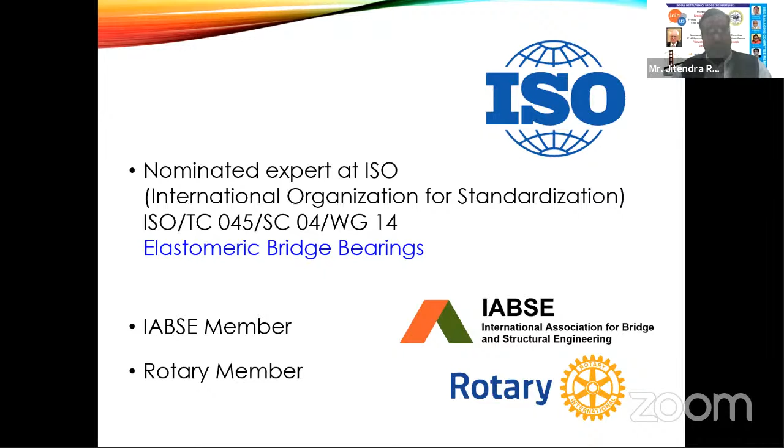Besides this, he is also a nominated expert at ISO, the International Organization for Standardization, where he deals with elastomeric bridge bearings. He is also an IABSE as well as a Rotary member.

Mr. Georg, as we all know, is of Austrian origin, but has been residing in Thailand, precisely in Bangkok, since the year 2011. There he is fulfilling the responsibilities of Vice President of the European Association for Business and Commerce Thailand, EABC, and Chair of the Working Group for Rail and Road Infrastructure.

So to summarize, we have with us today an expert conducting the presentation who carries experience of over 47 years under his belt. This experience covers the academic side, the specification forming and code development side, as well as professional experience. I'm very sure we're going to have a good learning experience through this interaction with Mr. Georg Wolf. Thank you very much, Mr. Georg, for joining us and accepting the invitation to be the speaker for this session. Now the forum is all yours.

I have a little bit of a technical problem. So, you see it's opened. Structural bearings - first, let me talk about past and present. The function of the bridge bearings, as everyone will know, is to transmit the loads from the superstructure to the substructure, as well as allowing for thermal movements and rotations due to traffic loads.

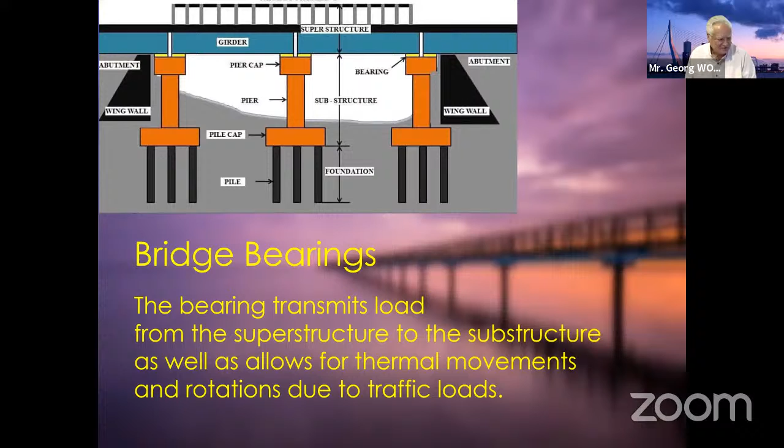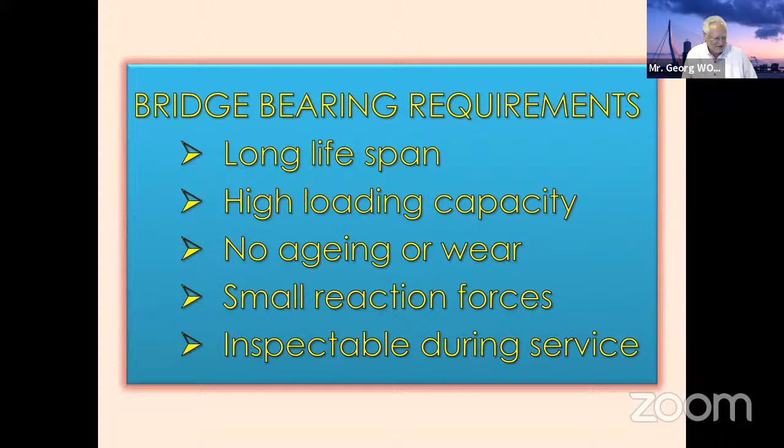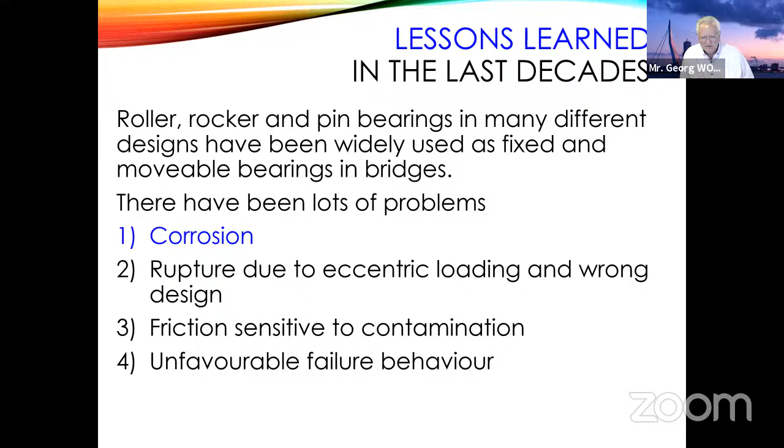And we learned a lot of lessons about this in the last decades. These bearings have been widely used, but they have a lot of problems. Mainly the problem of corrosion. Then we have some problems of rupture due to eccentric loading and wrong design. We have friction sensitivity to contamination, and we have unfavorable failure behavior.

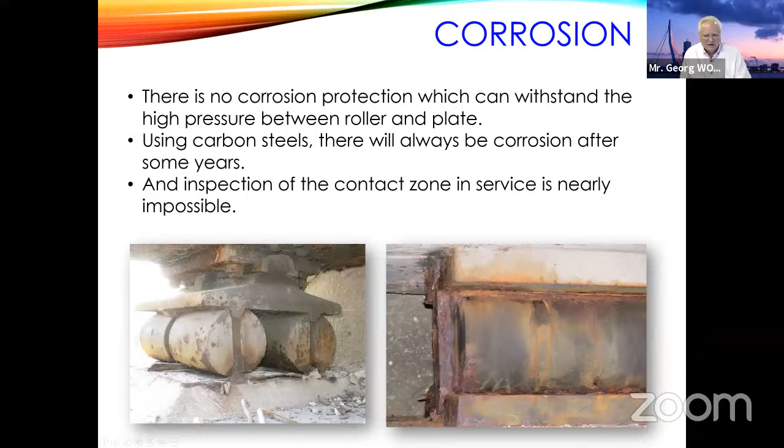So you see, these are examples of corrosion. Especially in many cases, we found a lot of corrosion at the contact lines, which is difficult to see from outside. It looked not so bad from far away, but in the details you will see that the bearings are not able to move anymore. The inspection of this zone of contact is very difficult. I think everyone who is checking bridges has already seen a lot of such examples in his job.

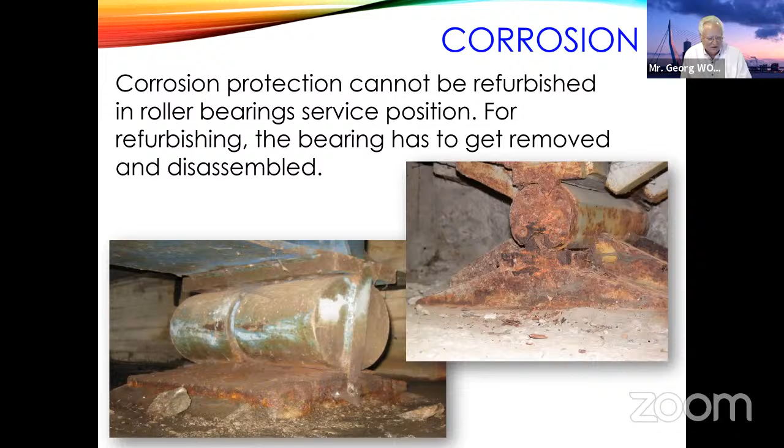At some time, in some countries, they tried to make stainless steel roller bearings, but as the loads are very high, you need a hardened chromium steel, and this is a big problem because with eccentric loading, when you have a little bit of transversal loading, it can very easily happen that the roller breaks.

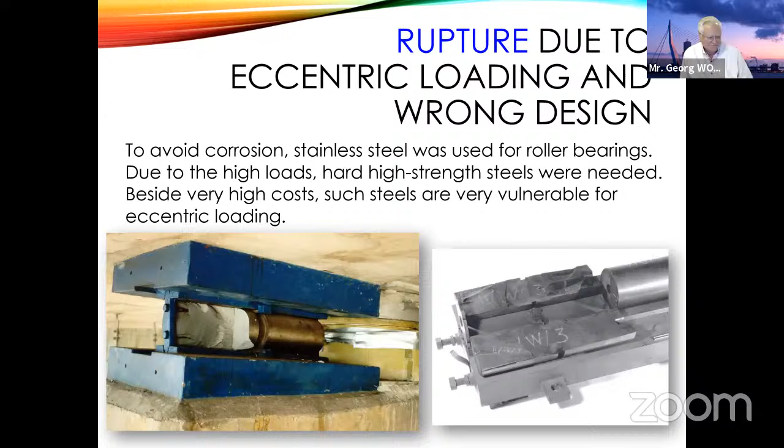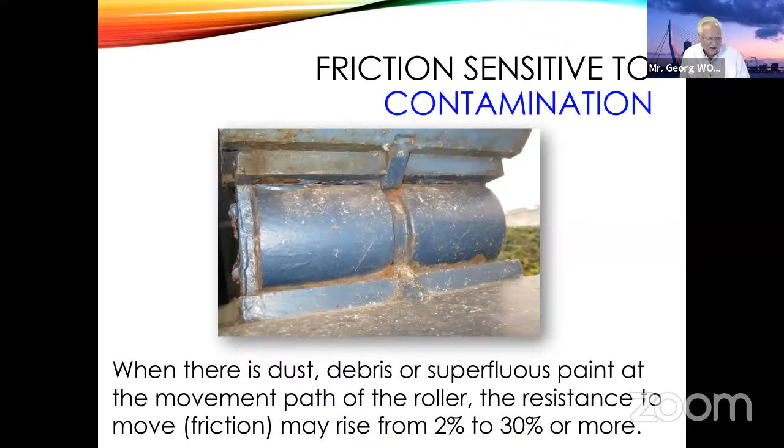Another problem we found is contamination. A lot of the roller bearings couldn't move anymore because a lot of debris and dust came to the roller level, and also we sometimes had people who were painting the bearings much too much. If you see here, you see the paint, and it happens that the friction went up a lot, and then the bearings were a reason that the bridge had to behave like an arch bridge and not like a flat bridge. Then another problem with those bearings was that in some cases the movement was too much, the roller was rolling out, and of course it has very bad behavior - the bridge is going down.

So this was the past, and then the modern times started with the laminated elastomeric bearing. This was invented already in 1920 by Mr. Freysinnet, but widely used only starting in the 1960s. The bearings are rubber reinforced with steel plate, where interestingly, the bonding in between has no technical function.

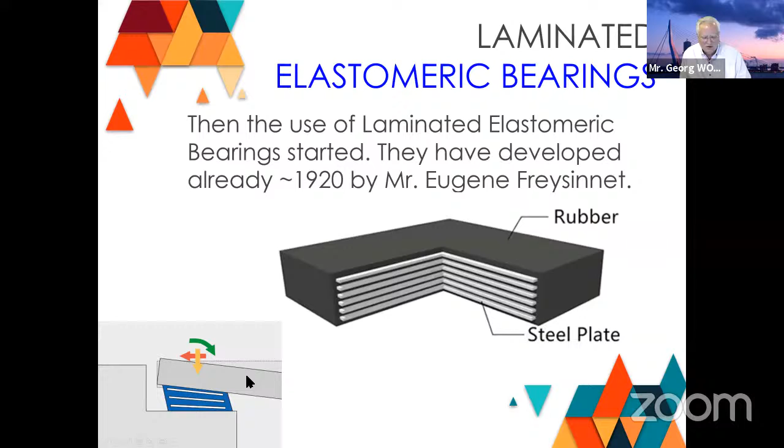If you just would take rubber sheets and steel plates, it also would work. The problem would only be that water can go in a little bit and you have corrosion. So the bearings enable movement and rotation, and of course load transfer. Here we see when we apply the load, we have a vertical deflection. When we apply the movement, we have a limit in this angle - it should be not more than a tangent of 0.7. And when we have a rotation, we have to put together the influences to check if the bearing can cope.

The bearing is excellent for vertical load transfer and free movement and rotation. The lifespan when the bearing is made of chloroprene or neoprene is very good. The same is today with natural rubbers, which include some anti-aging ingredients. The bearing is very well inspectable and it's easy to exchange.

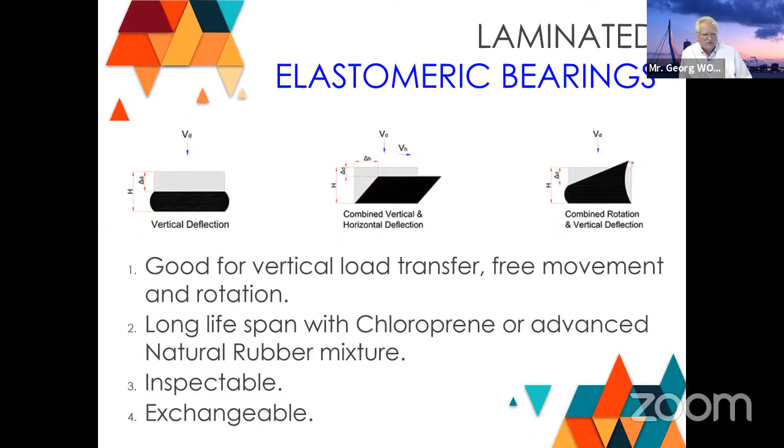Unfortunately, there are also some disadvantages. What we see as a limitation is we cannot transfer very high loads - 15 MPa, that was fine for the low quality of concrete we had some 50, 60 years ago. And we cannot transfer horizontal loads. Of course, you can make a combination with some steel restraints, but then you get again the corrosion problem. And when the movement is increased, the thickness is increased, and this is then also increasing the vertical deflection.

And you know, when I started my job, we designed the bridges only from a statical point of view. But today we always learn more that we have to look at the dynamic influence and especially the fatigue. The biggest problems with this fatigue we are getting at the railway bridges.

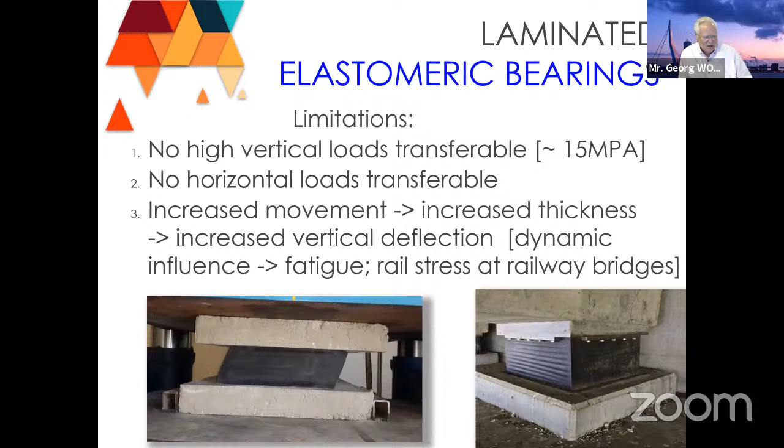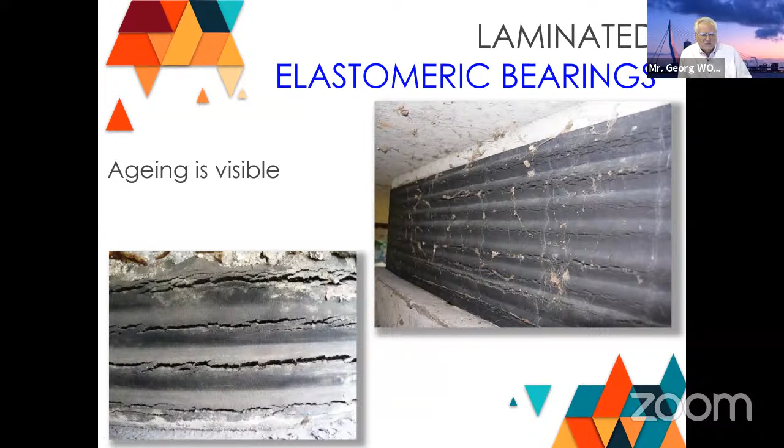Another problem is the slip out danger, especially in the warm climate. It can be a problem. Some manufacturers have waxes in the mixture, and at some temperature the waxes come out and have an effect like greasing of the surface.

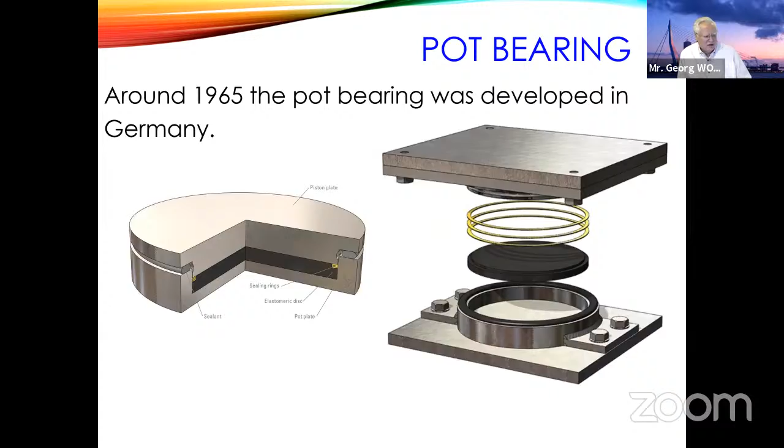This was, let's say, in the 60s, and then in the end of the 60s, in 1965, in Germany, the pot bearing was developed. The pot bearing is a steel pot with a rubber disc inside and with a seal. So the rubber is working like a fluid in a hydraulic cylinder, and you have a piston. On top, then shortly later, we got the PTFE sliding material, and in combination you can make sliding bearings and guided bearings.

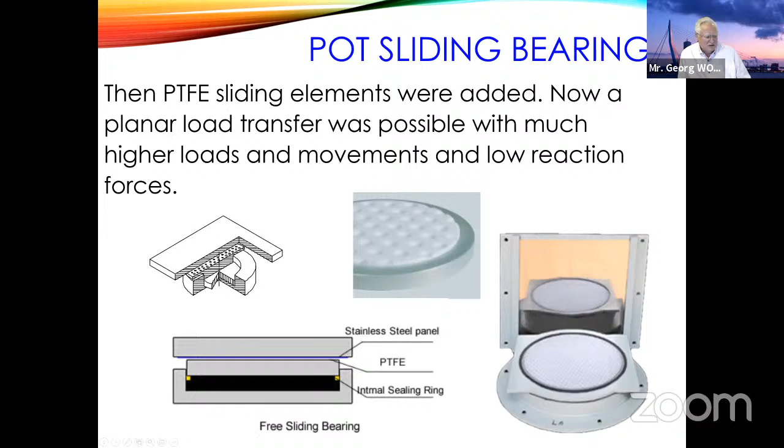This was then for a long time the best bearing to have high loads and movements with very low reaction forces, also at low temperatures, and hundreds of thousands of those bearings have been installed worldwide.

We can have a much better load transfer, an average around 30 Newton per millimeter square. We have very low reaction forces, also to the rotation. It's a very soft rubber inside, and it was used worldwide all the time.

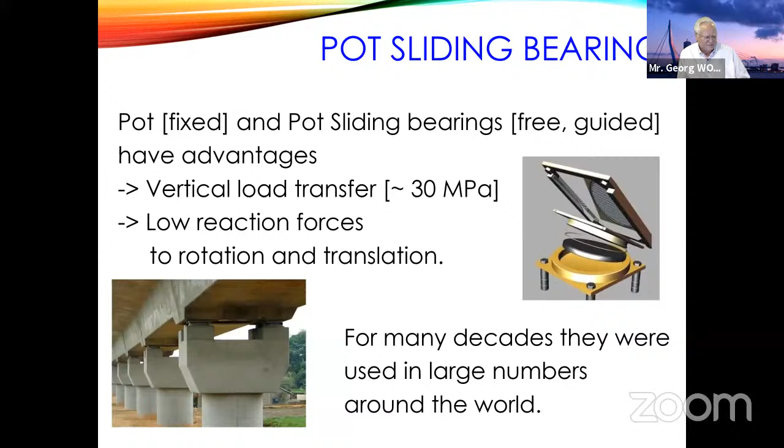But after some decades, not years, really decades, we found an increasing amount of long-term damages of the pot bearings caused by corrosion. The problem is the internal corrosion is invisible from outside, and it destroys the seals on the inside when the bearing is moving. Sometimes the corrosion is so heavy that it blocks the rotation of the bearing.

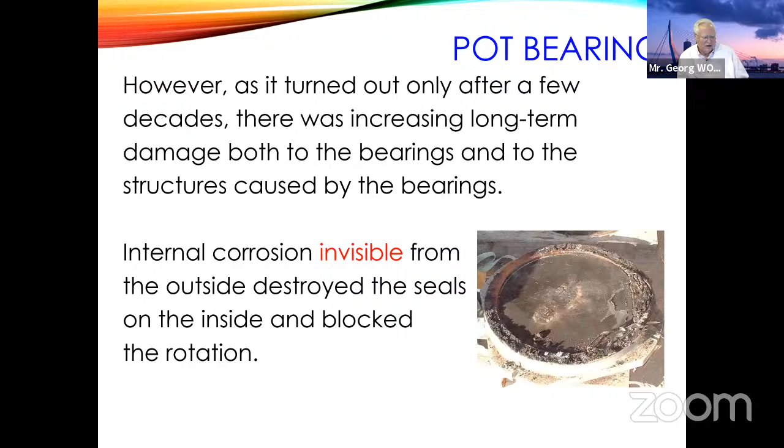These are some typical pictures here. You see this surface here, it should be sliding. It should be like the inside of a hydraulic cylinder, a very smooth surface free of corrosion. But when you have corrosion and it's moving, then this surface gets rough, and it really destroys the elastomer pad inside.

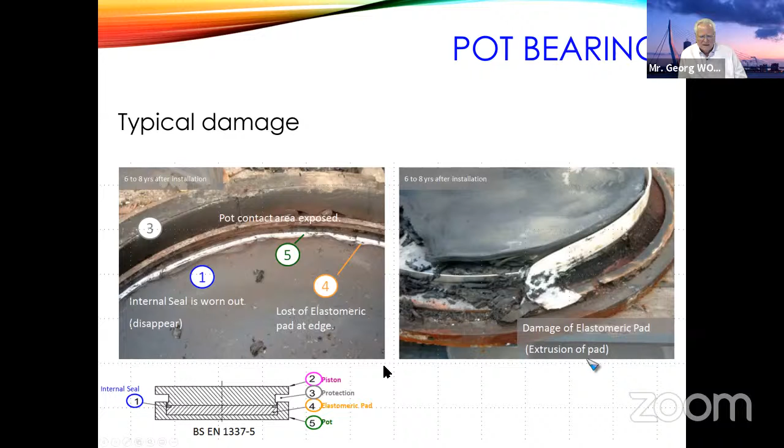These are the critical points here: this contact surface and the seal below. Of course, when you have a high quality seal, it will take much longer until you get the proper damage.

And of course, you could also do something against it by using stainless steel. So for around 8 years in Singapore, for example, only pot bearings made from stainless steel are allowed, but that's really incredibly costly. And still there is the problem that you have no check of the seal. You just have to trust that when you have stainless steel, you have no corrosion.

On top, we have the PTFE sliding, and in the long term we have seen a lot of wear here. Especially endangered are steel bridges, because they have more movement than concrete bridges, and this causes the wear. And of course, also railway bridges. I will come to that later.

The PTFE you can check from outside, but the pot itself inside you cannot check. This is how the damages look when the rubber is extruding because the seal is failing, or when the PTFE is extruding. The Deutsche Bahn was the first one who found out a lot of these damages.

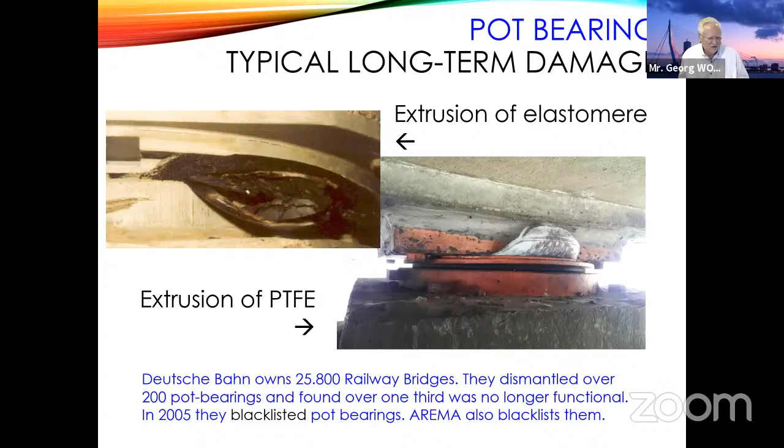Let's look to the PTFE, also called Teflon. It was developed in the 1950s, polytetrafluoroethylene, and it was the only long-term material transferring high loads with low friction. First used for bridges in the 60s, it became widely used worldwide. The negative long-term effects of creep and wear were neglected, and there was no real alternative.

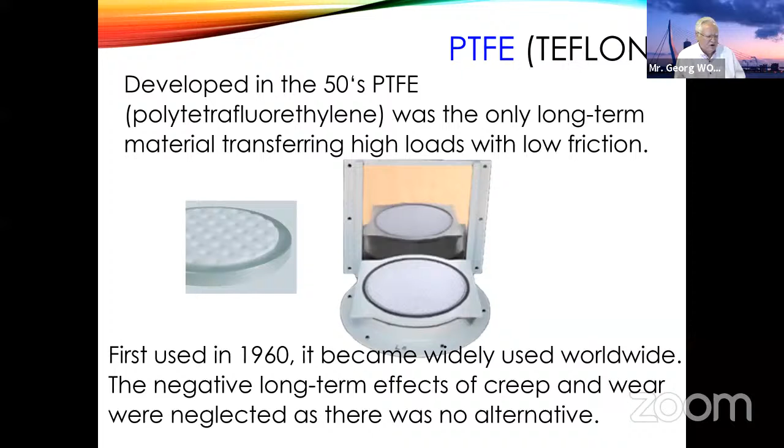When we look to the tests, you see here we have a PTFE test with 45 megapascal for 20,000 meters accumulated slide path. We have to say the PTFE is not looking good, but it's still alive. And 20,000 meters is a very high number.

On the right side here, we see a test of a non-dimpled PTFE. Normally the PTFE has dimples with the fat, with the initial greasing and lubrication, but in the guides you use it without the dimples, and this is already after 2,000 meters, it's heavily worn out. The problem is the thickness over the recess is only something like 4 millimeters maximum. And if the 4 millimeters wear away, then it touches steel to steel, and then suddenly the resistance to the movement jumps up. The problem is it's not very well visible. You really have to inspect quite often to find it.

And if the PTFE is overloaded, which can happen very easily due to rotation with eccentrical forces, then you have a long-term creep which is more or less not stopping. It's like a dough for a noodle - you squeeze it and it goes out.

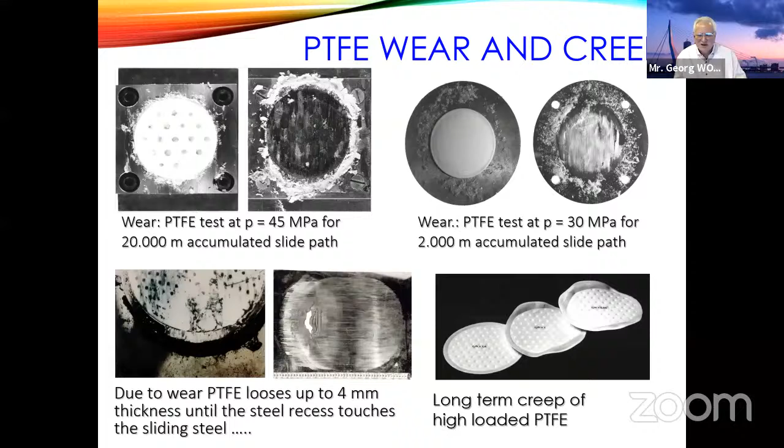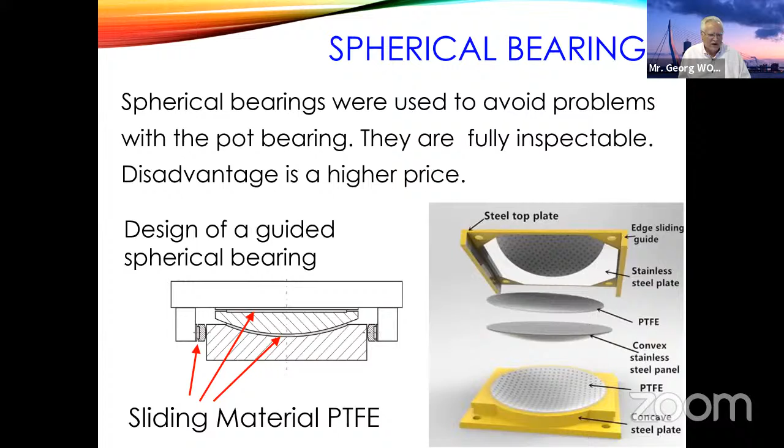To avoid the problem with the pot sealing, in a lot of countries they changed to spherical bearings with the PTFE, because at least you can check the PTFE from outside. It was working quite okay, but this type of bearing was more costly than the pot bearing, about 25% I would say. But very large such spherical bearings have been installed, you see a picture here.

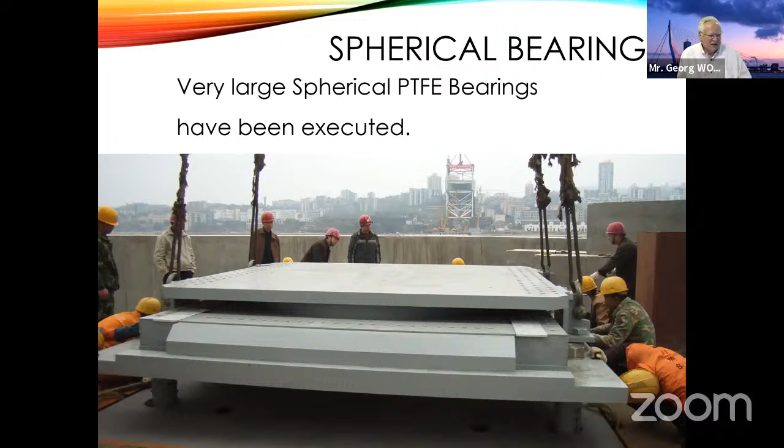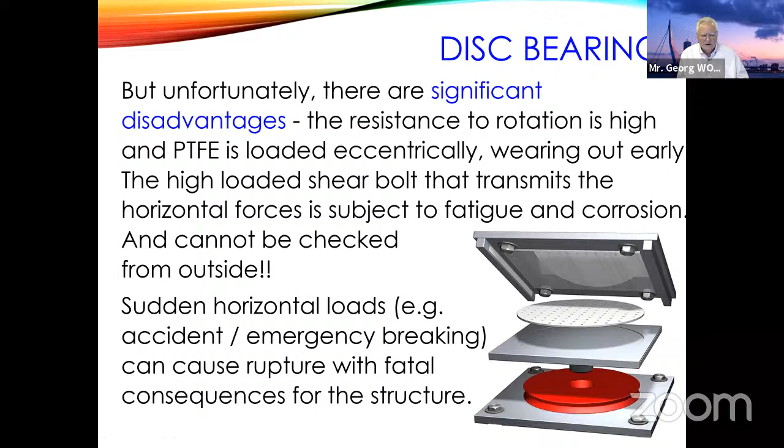And this bolt in the middle, which transfers all the horizontal forces, is subject to fatigue and corrosion, and it cannot be checked from outside. So when you have sudden horizontal loads, e.g. for a railway bridge you have emergency braking, or in a road bridge you have an accident on the bridge, then it can happen that the bolt breaks suddenly and you have no more safety for the horizontal forces. This is always covered, it's invisible. And this was the reason in Europe this bearing was never used.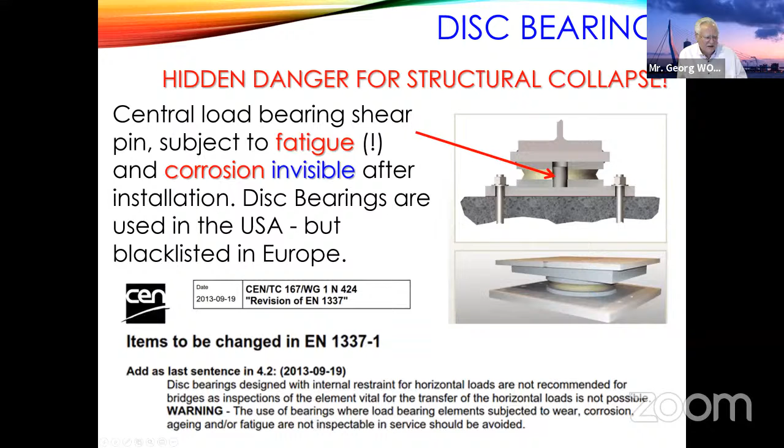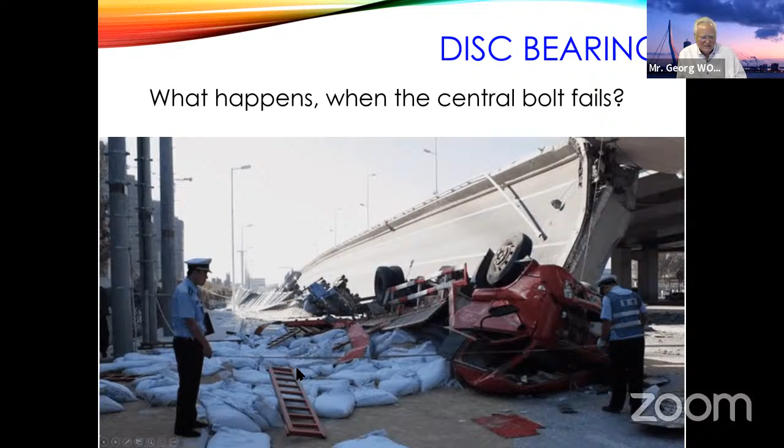So when the central bolt fails, it can look like that. I mean, this is just an eye catcher. I don't know really the reason for this falling down of a deck in China. Oops, sorry, I was a bit too quick now.

In 1969, Germany developed the magnetic levitation train, Transrapid, which is today in service in Shanghai between the airport and the city. There was a test track, and in this test track, PTFE bearings were installed. Within a short period of some months, the bearings were destroyed because the train causes a very small movement with a very high frequency, like a sewing machine, and the PTFE couldn't cope with that. It has incredible wear.

In the time of this development, around 1995, some bearing manufacturers in Europe joined together in search of better materials, and they found ultra-high molecular weight polyethylene, UHMWPE, and developed the material, testing different formulations, finally getting a European technical approval for it in 2002.

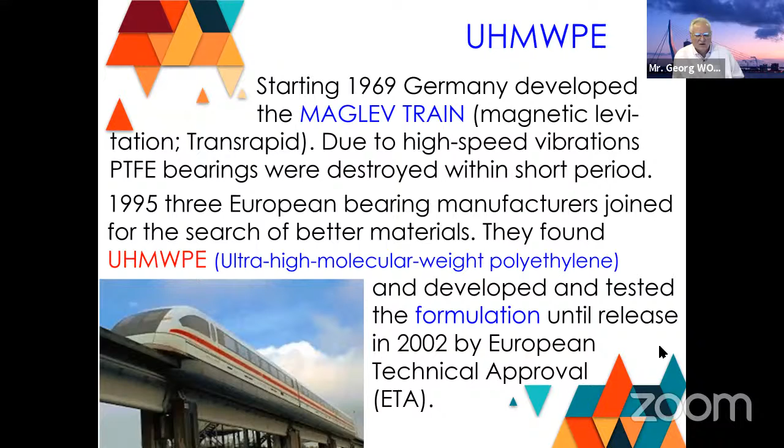This material has a lot of advantages. It was a kind of technological breakthrough in terms of service life, because with this material you can transfer much higher loads with low friction, and you have no wear and no creep. The material is absolutely resilient and undestroyable. It has no aging effects.

So we found, since we know the material, no change of the material if you are within the load limits of these approvals or even further. The material itself has been used over 40 years as a successful biomaterial for artificial hips, knees, and spine implants in clinical use.

But this has a white color, and the special thing for the bearing is it's a mixture in the material with some ingredients which are, how to say, not disclosed to the public.

With this material there was a 50,000 meter test, running for an incredibly long time at a temperature pattern where the temperature changed from -35 to +40 degrees. When you look at this material after this incredible test, you see it has no wear, just some marks or scars from the movement, but it's still like new. You could make another 50,000 meter test, but that would be too costly. The test was running at the University of Stuttgart, and it was very expensive.

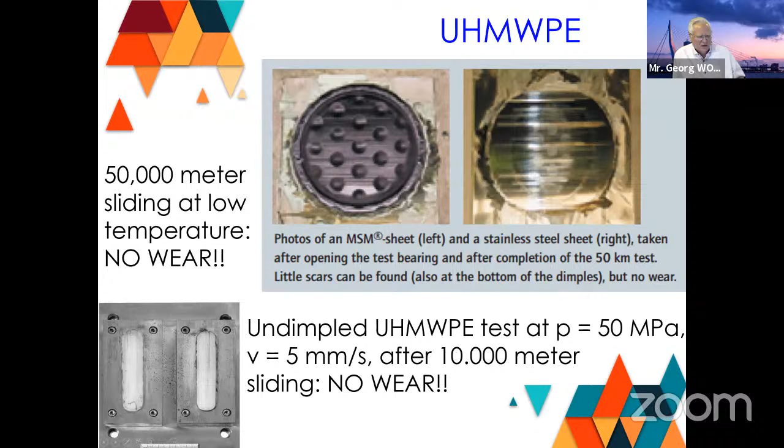Below you see the undimpled material which is used for the guides, also tested with a high load of 50 megapascal. After 10,000 meters, nothing, no wear is visible. If we compare this again to PTFE, it's very obvious what a big difference there is.

So this material can be used in the spherical bearings. You can have the rotation with this material, you can have the sliding movement, and also the guides with the material.

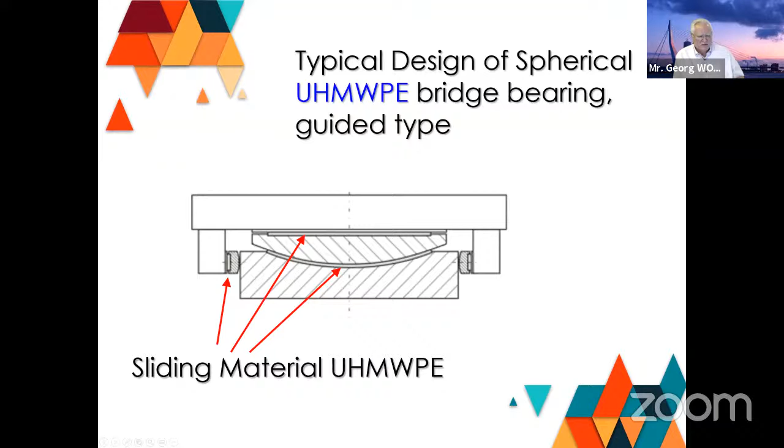When you compare now 3 designs of bearings, you see the high load capacity. For a vertical load of 10 meganewton, the rubber bearing will have a diameter of around 920 millimeters. The pot bearing will be around 650, and the ultra high molecular weight polyethylene disc will have only 400 millimeters. This also goes very well with the use of ultra high strength concrete, which is getting more common. And of course, when the bearing is much smaller, it's also cheaper, it has a lower price.

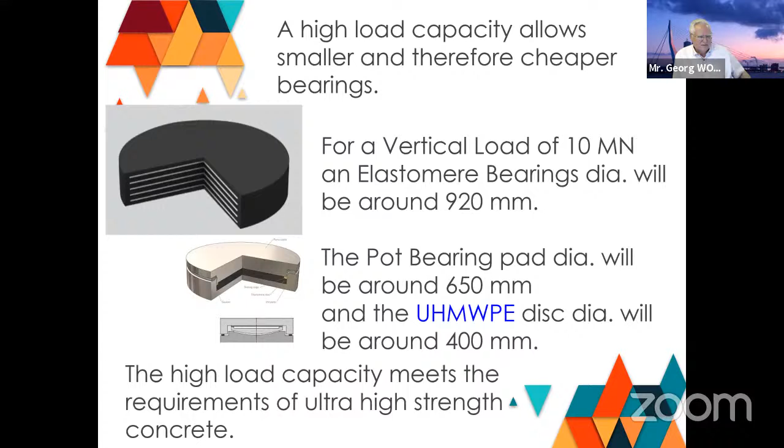The prototype testing lasted 3 years. The limits for loads, temperature, aging, environment, and wear of the material were researched by official test institutes with very high effort. You see here a picture of the 50,000 meter sliding test, here's 45, 60. That was then the basis for granting the approvals.

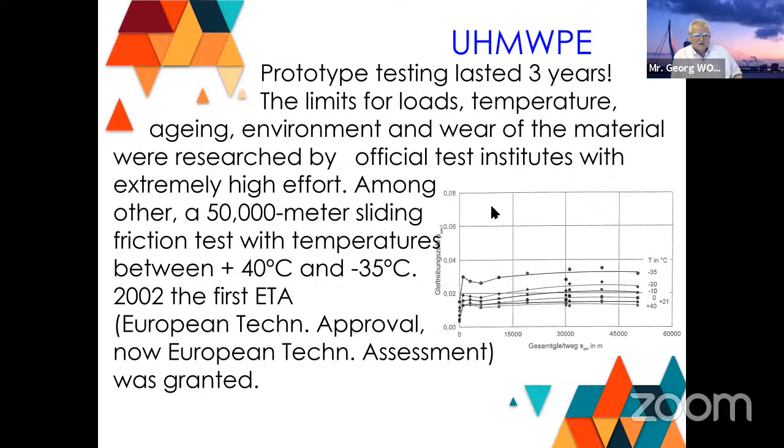So first the name was ETA, European Technical Approval, and then there was a change in the European Union's laws, and they changed the name to assessment. So 5 manufacturers got such ETAs for this material, and it's also very successfully produced in India already.

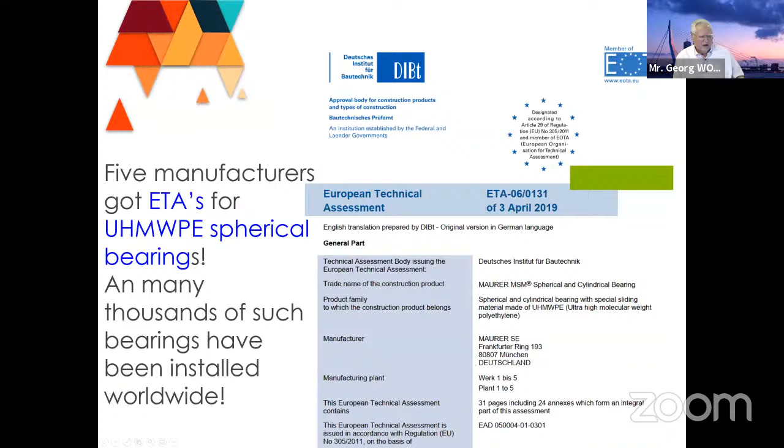Now, in the last 2 decades, many thousands of such bearings have been installed worldwide. Then there are some details which still needed improvement, because the basic steel parts have a corrosion protection, but for the calotte it's very difficult. You cannot make a very thick paint under the material, and so in the first bearings it was a chromium plating, but that was not so good.

We mean this bearing has the same lifespan as a structure, so it may be 100 years, and people had some doubts about the corrosion. So today it's state of the art to produce this part, the calotte, from a corrosion-resistant material like stainless steel or aluminum alloy.

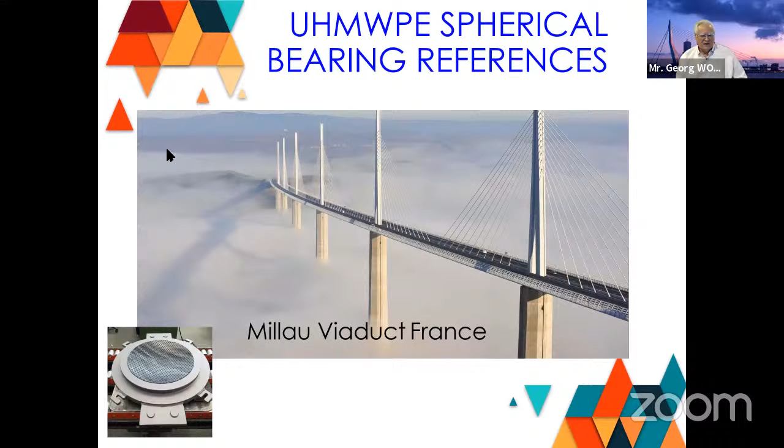Some references for those types of bearings: for example, the very famous Millau viaduct in France, or in India, in Delhi, the Wazirabad bridge. Under the pylon there are 2 giant such bearings for 231,000 kilonewton. You see the picture here, and they were fabricated in India at Sanfield under the eyes of Mr. Jitendra.

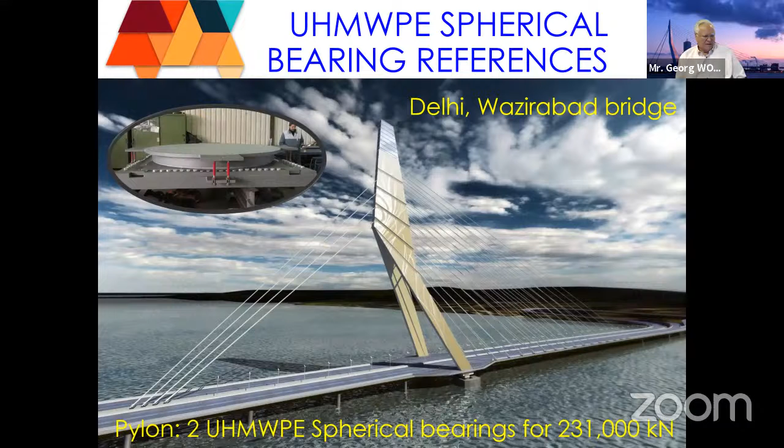Another thing, in Thailand, up to today, we installed nearly 10,000 such bearings. Only in one project, Red Line, we installed 4,712 such spherical bearings, and they were all made in India. So that's a very good reason.

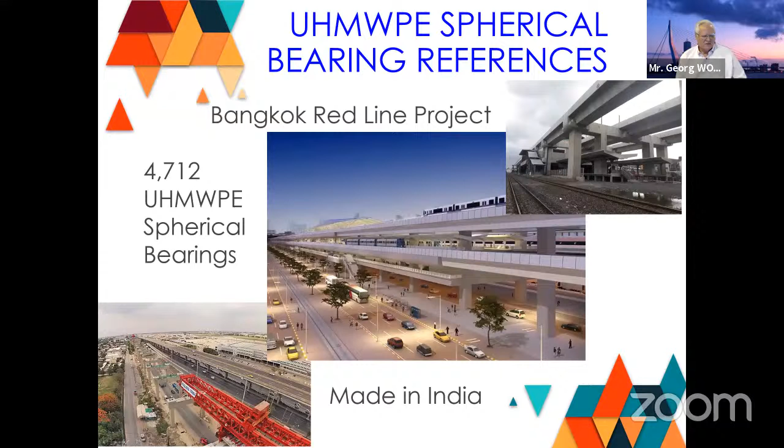We have to talk here about the temperature, because all those sliding materials, the PTFE and also the UHMWPE, are thermoplastics. They are sensitive to temperature. The PTFE can be used between -35 and +48 degrees. This is the temperature of the standard and of the test. Of course, you can use Teflon for much higher temperature. In your kitchen, you have pans with Teflon, and you can heat them up to 300 degrees. But the tests for the sliding materials were just in this range.

And the characteristic compressive strength is 90 megapascal up to 30 degrees, and then it goes down, and at 48 degrees, as this limit, it's still 57 megapascal.

But the ultra high molecular weight polyethylene can be used between -50 and 48 degrees in the first generation, the first tests. But some short time ago, around 6 years, there was a second generation developed. It's called MSM Plus, and here you can even use it up to 80 degrees Celsius, with a characteristic strength of 180 MPa. Compare that, it's double what you have in the PTFE, and at 80 degrees it's reduced, but it still carries 75 megapascal. And this system for seismic load can even take a compressive strength of 240 megapascal. So that's really a big step.

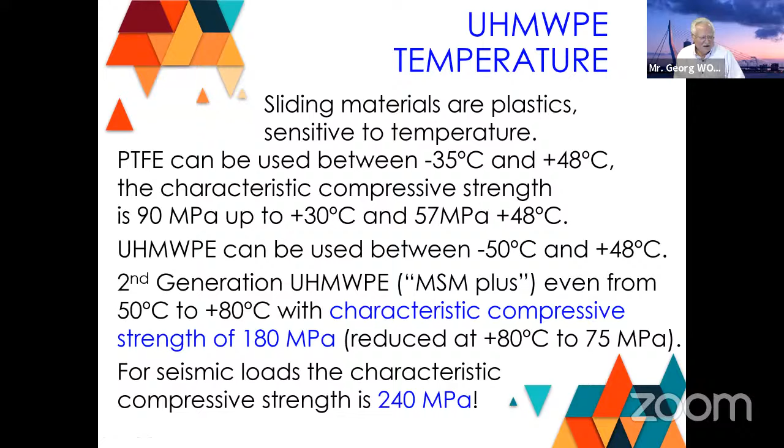But another problem is that civil engineering standards mostly consider only the shadow temperatures of the past. And the bridges are mostly exposed to direct sunlight. I personally have seen big problems, for example, when asphalt was applied to a steel bridge. That asphalt had a temperature of nearly 200 degrees when it was put on the decks, and it warmed up the decks like crazy. So the bridges are exposed to direct sunlight, and sometimes you have black asphalt on it, so you need a provision for the future.

So from my point of view, in the warm countries, like most parts of India, you would have to consider at least something like plus 60 degrees to be on the safe side.

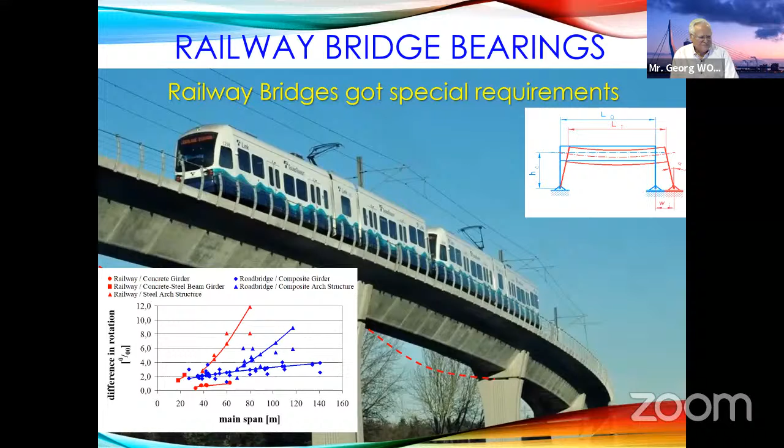The biggest problem is with long span steel bridges here. These cyclic moving loads, so many trains passing the bridge every day with higher amplitude compared to roads, they cause a rotation at the bearing point. So in a lot of road bridges, you cannot find any real rotation due to the traffic load at the bearing. But when you look at the railway bridge, in nearly all cases, you can measure the rotation when the train is passing.

There is a big interaction between the deck and the track. You have to always imagine the rail has to go through and is connected with the deck. And that's not the same in the road bridge. You have the expansion joints, and if it's a little bit bumpy there, it's not so bad. But if you have problems with the rotation of the railway bridge, then you bring a lot of additional stress to the rails, and that can make big problems.

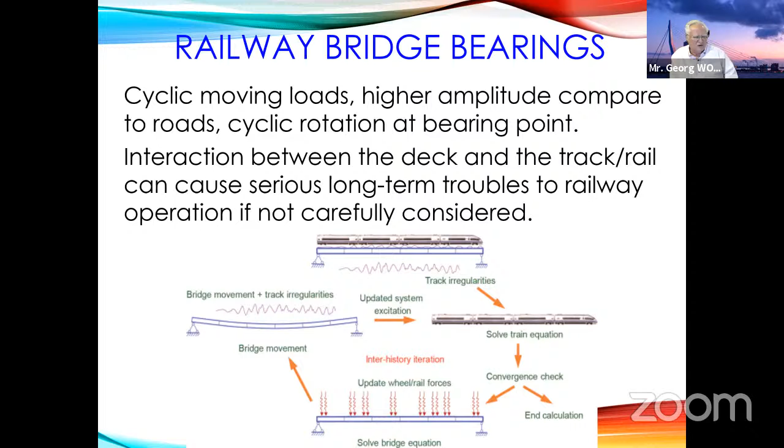So up to now in the standards, we don't find any hints for railway bridges, but in the next revision of the European standard EN 1337, there will be an informative annex which describes in detail what you have to take care of when you select the bearing design for a railway bridge.

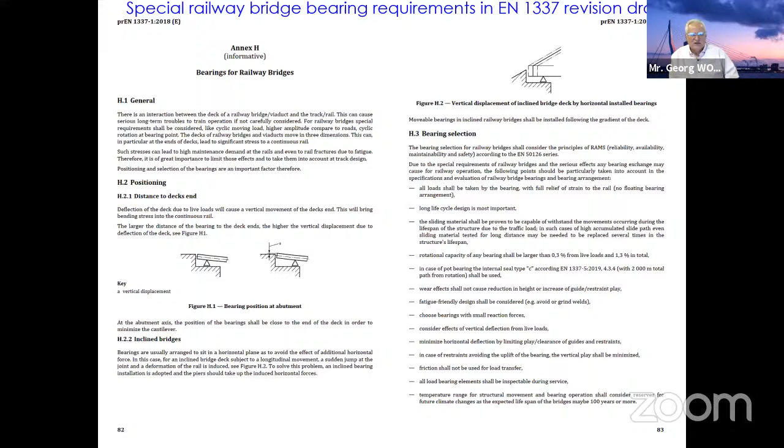There are some things like the arrangement of the bearings. You have the vertical deck displacement, and if you use the elastomeric bearings, they act like a spring. That's the same for the elastomeric bearing and also for the disc bearing.

And this causes a permanent fatigue stress for the rail. It's very small, but every time the train is passing, you have a deflection of some small number, and this makes an influence, especially for high-speed trains because they don't have the ballast.

When you have a ballast on the railway bridge, it is a small problem because the ballast will equalize these movements of the deck. You will just have more maintenance of the ballast because it's then a little bit like a stone mill.

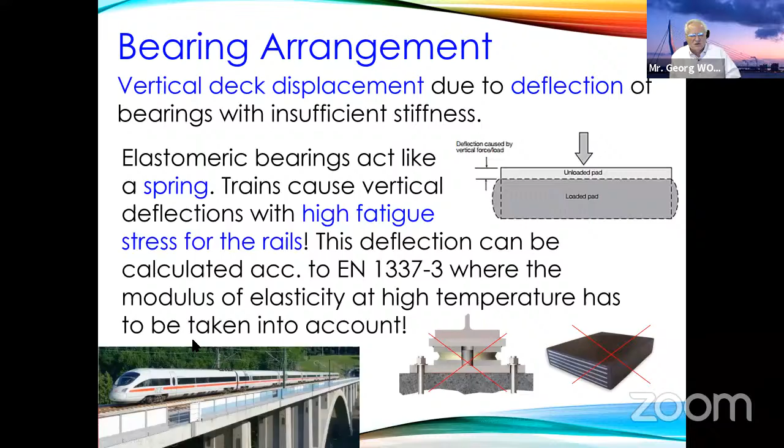But when you have a slab deck with the slab track, then it's really very bad when you have a deflection, so you need a stiff bearing. Otherwise, the stress can lead to fatigue cracks under the surface or completely. I know a bridge here in Thailand where every 8 years they have to exchange all these clamps because they are breaking due to fatigue. And they should change the bearing.

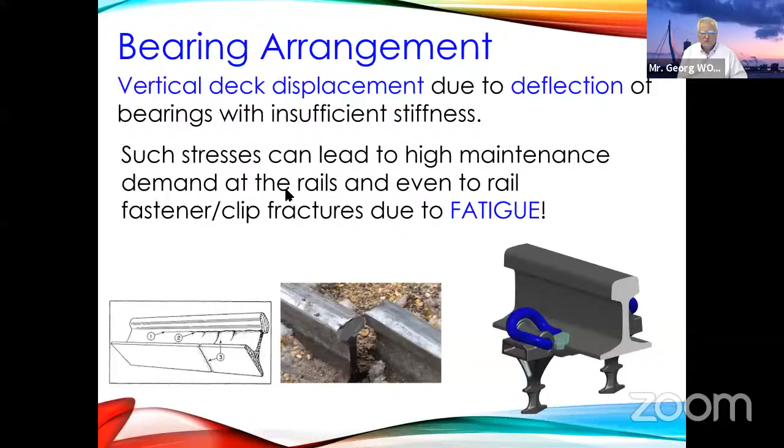This is a vertical displacement, but we also have problems with horizontal displacement. We found some bridges for the railway designed with a floating arrangement on elastomer bearings, and that works because the rail itself is holding the bridge in position and is transferring the horizontal forces. But that's not what the rail is designed for. It's not calculated to hold the bridge.

And there is sometimes no good communication between the engineers responsible for the bridges and the engineers responsible for the train system and the track. That's an international problem.

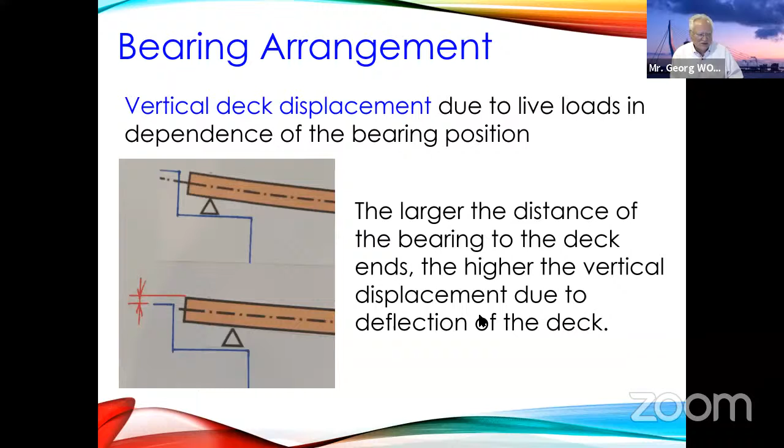Then we have another vertical problem. In some cases we found the bearing is much too far away from the end of the deck, and the rotation will cause a gap on the surface. If it is a road bridge, this is only a minor problem, but if it's a railway bridge, this is also causing additional stress to the rails themselves.

Similar problems occur when you have an inclined bridge deck, when you have a slope, and the bearing is installed horizontally. The old rules say bearings should always be horizontal, but that's not good if it's a movable bearing. If you have an inclined bridge and the bridge is moving, you get a step between these points. This is not good for a road bridge's expansion joints, but it's completely unacceptable for railway bridges.

So where people listen to me, I convinced them to install the movable bearings for the railway bridges on the slope. Normally the slope of railway bridges is very small and it's not really a problem. You just get a little bit more force on the fixed bearing, but then you have a smooth movement and no stress on the rail.

Oh, sorry, it was a bit too quick.

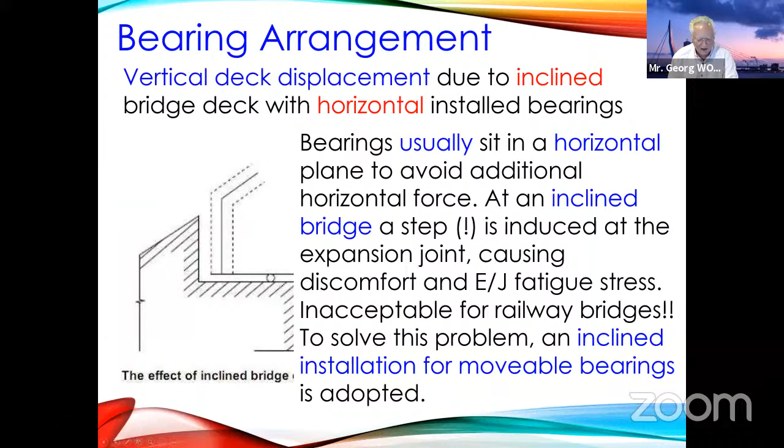So I'm sure you're also interested in the cost of the bearings. From my experience, on average, the cost of the bearings is only between 0.9 and 1.3% of the bridge building budget. When you look at the different types, the traditional PTFE pot sliding bearing is 100%, then the rubber bearing is much cheaper, only 50%, but it needs more space, of course.

The disc bearing is also cheaper. The PTFE spherical bearing is a little bit more expensive, but, and this is the good news, the modern bearing with the long lifespan is cheaper than the traditional solution because the size is smaller.

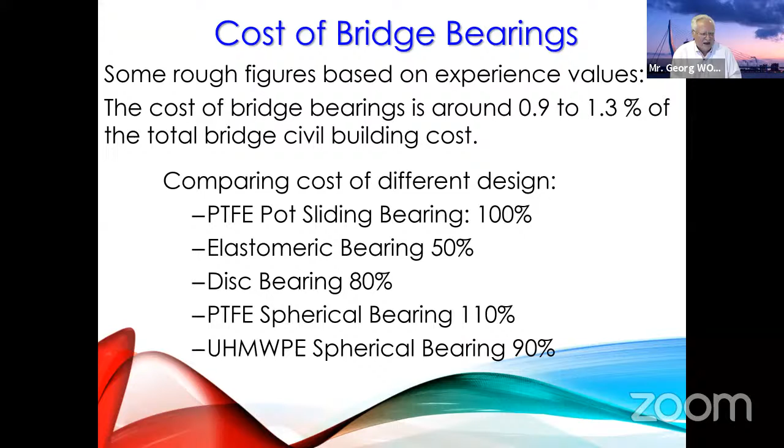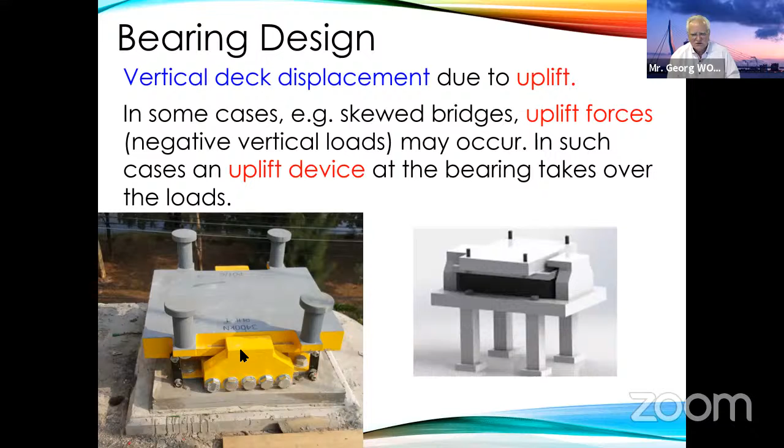In the design of the bearings, in some cases we also have uplifts, especially for skewed bridges, and such uplift devices are very often designed in the form of clamps. But when this is designed, we have to learn that there is no standard covering these uplift things.

The standards, I would say, are anyhow not a cooking recipe. We still need engineers. We still have to switch on the brain. We have to think a little bit and not only follow the standards blindly. And I have seen many such uplift clamps with incorrect design.

The vertical play has to be very limited, smaller than the recess of the sliding material. Otherwise, the sliding material can stick to the surface of the stainless sliding steel, and when you lift it up, it goes out of the recess and will not come back into the right position. Also, the clamps must work in the rotated position of the bearing, so they must have a curved contact surface. In a lot of cases, this was missing.

For short-term uplift, it's a good solution. If you have a long-term permanent uplift, which in rare cases can occur, then you also need a sliding element in these uplift clamps, or you need a special design of the bearing. But you should always keep in mind that such things shall still be inspectable at all times from outside.

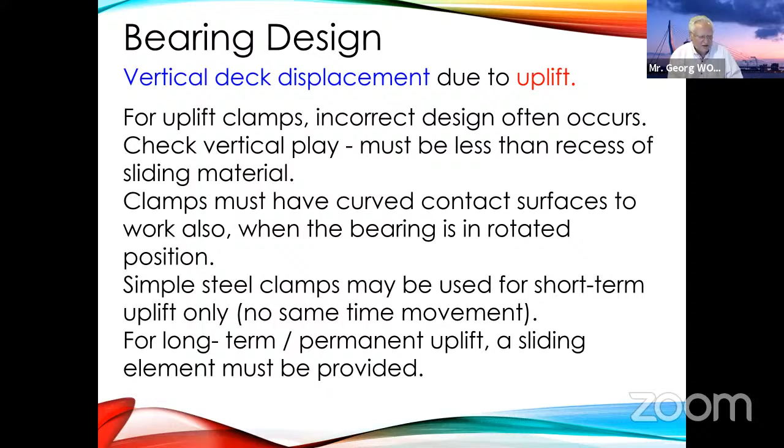In some cases, we have to exchange old bearings, and sometimes there's not so much space. So there was also development of a spherical segment bearing, which is also covered by ETA. Here you can install a bearing instead of, for example, a roller bearing very easily, with the same advantages.

Another thing for the exchange of the bearing: there is very often a problem connecting the bearings on top to the bridge, because the dowels from the old time are in a different space. So we have a very good development here, because in the last decades there was a lot of progress with bridge strengthening by means of steel or CFRP lamellas. For this purpose, bonding agents and bonding processes were developed, also with ETAs. With the same materials, you can bond the bearings to the deck.

We just have such a case in Singapore, where they have to remove a lot of old pot bearings, and the new spherical bearings are bonded on top to the deck. Then it's no problem at all to take horizontal forces up to 30% of the vertical loads. I showed here a sample of such a bonding material. Of course, it's not only Sika—there are a lot of companies that already have this approval.

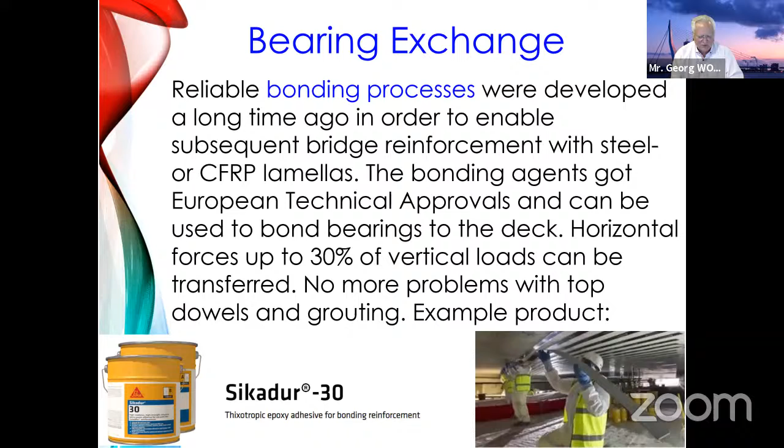So that was the first part, and now maybe some words about the standards for bridge bearings. In Europe, we have the European Standard 1337 for structural bearings, and we have European technical assessments, or approvals, both based on the Eurocode—it's a system together. In the US, which is also used a lot in many countries, we have AASHTO for the road, AREMA for the rail, and ASTM for some materials.

The development of the European Standard 1337 started in '89, and I joined the committee in 1990. Before that, there were some national standards like British Standard and German DIN standards, but many countries had no standard at all. The development of this standard ran in parallel with the development of the Eurocodes, the 1990 series, which covers all the building codes. This was quite complicated, because many of the drafts made in the committees were rejected because of the system change of the Eurocode.

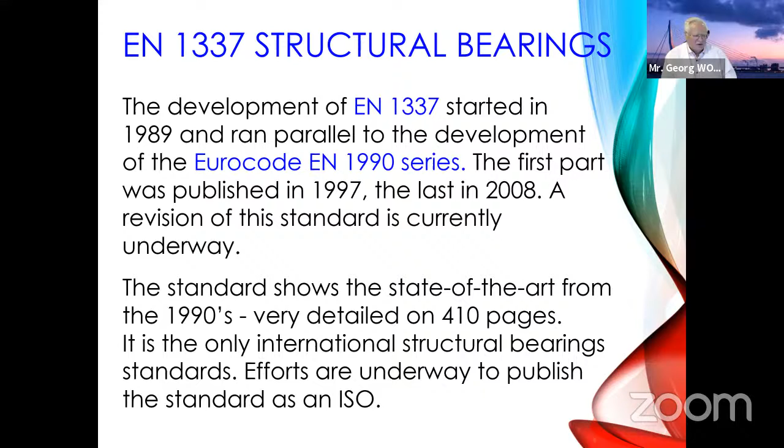The standard contains a very complex quality system that includes permanent control by third parties—special independent institutes. They need accreditation from the European Union, and it's traceable on the internet. So you can look at the type plate of a bearing, see the number of the third-party inspector, and check on the internet, in a table from the European Union, whether this surveillance contract is still valid.

For developments outside the range of the standard, as for example this new sliding material, the ETA is required. But the ETA, issued by an approved body, always strictly follows the standard as far as applicable, so you can be sure that the ETA quality and the standard bearing quality are the same. In both cases, you can get a CE marking, which is the official sign that all requirements are met—and this really guarantees the highest quality and lifespan.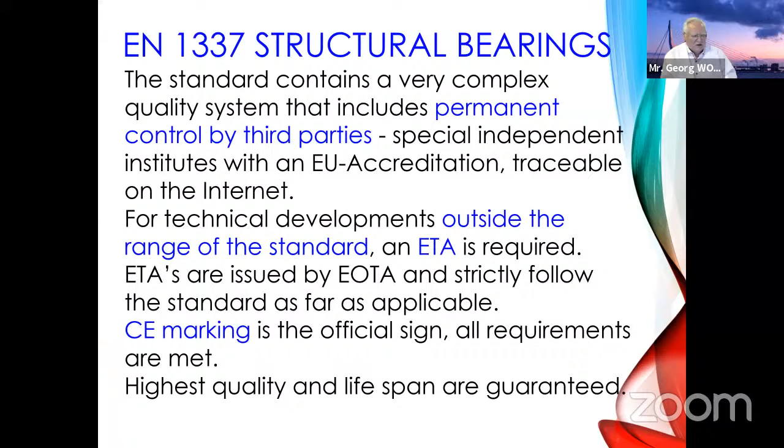The European standards are issued by CEN, the Center of European Standardization. Not only the 27 EU member states are members, but CEN has 34 member states, including the UK after Brexit, Switzerland, Norway, and Turkey. But any country can join CEN, and any manufacturer worldwide can apply for CE mark, contract, and ETA. So the system is not limited to Europe and is widely used outside of Europe.

The special thing is the Eurocode always allows introducing national requirements. They have so-called boxed values. They suggest some values, but it can be regulated differently when the national requirement is different. A very good example is the temperature range.

And the ETA system allows it to be always up to date and permanently learn from actual development. If a product has an ETA and it turns out later there are problems which were not covered, then the ETA will be withdrawn, of course.

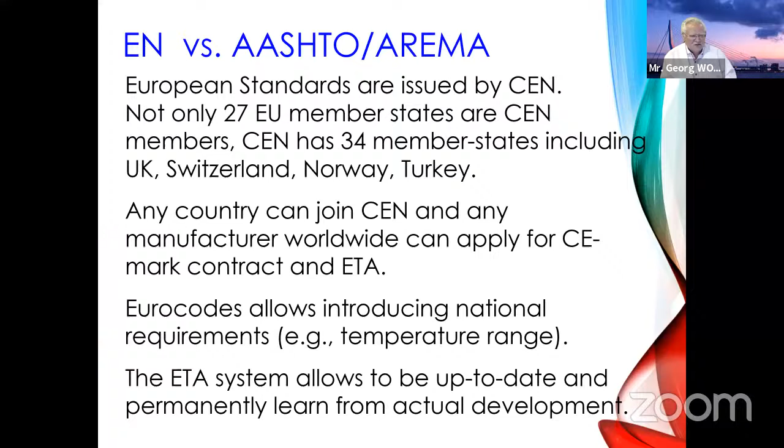Now when we look at AASHTO, AREMA, the United States, they have a very different understanding, a different philosophy. They have no standard for the bearings. They have a bridge design code, one for the roads, and one included in the manual for railway engineering. So AASHTO has only a chapter about the bearings, some 50 pages, so it doesn't cover a lot of the details.

Some materials are then covered by ASTM codes, but special materials like, for example, the seal for the pot bearing, are not really well described there. The standard in America always says the engineer has to decide, but the problem is that the engineer of an actual project may not have the experience. So in fact, the bridge designer and the bearing supplier have to consider many things which are not stated in the standard. And also the quality system is very different.

The US has the philosophy that the supplier is responsible, and we also make some load tests. The supplier says we have 10 years warranty on the bearing, so when a problem happens, the supplier has to change the bearing. But this doesn't cover when problems happen 20, 30, or 40 years later. And the load tests, I've been so long in this business, I've never seen any bearing which didn't pass the load tests. It's not a real problem.

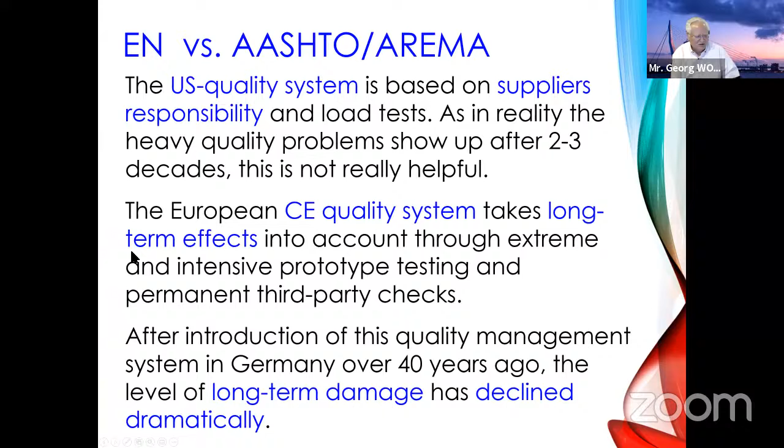Okay, that was what I wanted to say about the bearings. Now a short word about the anti-seismic devices. For the anti-seismic devices, we have a European standard, 15129. The latest edition is from 2018. This is based on Eurocode 8, design of structures for earthquake resistance.

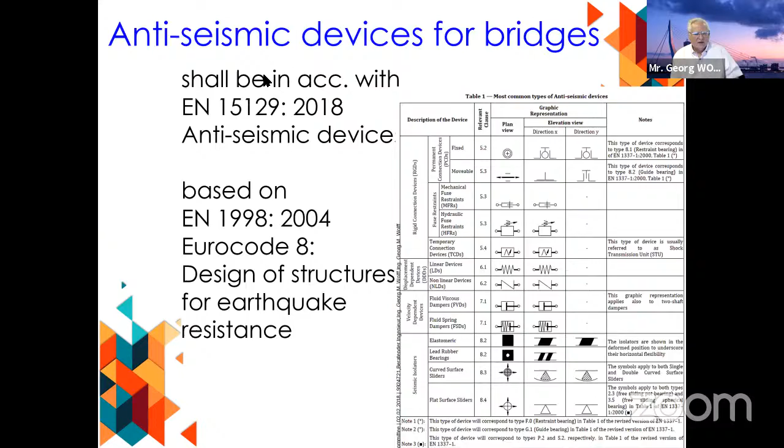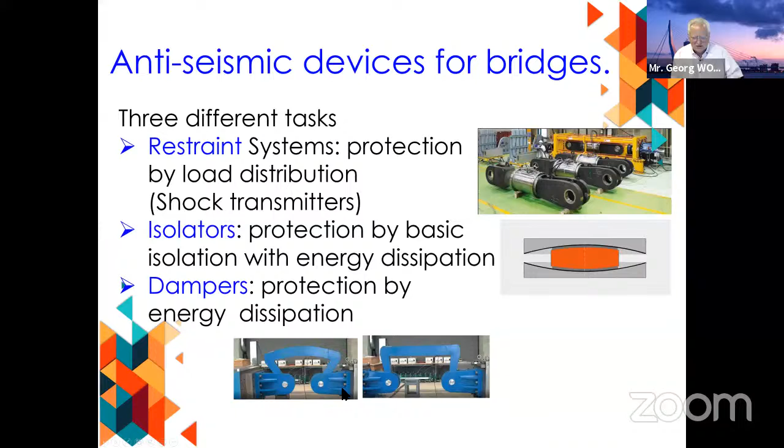You see there are a lot of different types listed. For the bridges, we have 3 different tasks. We have a restraint system where we want to protect by load distribution, meaning the bearing has to take the additional force of the earthquake. Then we have isolators, which are protected by basic isolation and also have energy dissipation—you see a principle sketch here. And then we have dampers, which are mainly for energy dissipation; this is also an example here.

For the restraint systems, we use the bearing itself, but we add the horizontal force from the earthquake. We have a bigger restraining ring or guides, or we can have shock transmission units which are free movable for slow movement, like coming from thermal expansion. But when the seismic shock comes, they are stiff and can transfer the horizontal load to the abutment, so that the piers are not heavily loaded.

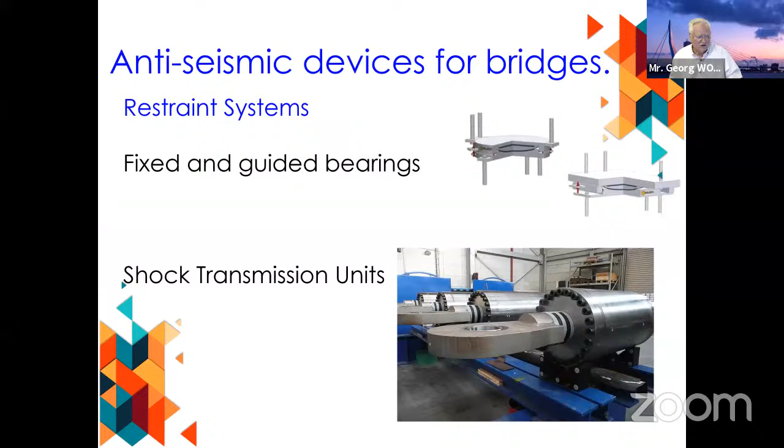For the isolators, we have different designs. One is an elastomeric bearing—a kind of regular elastomeric bearing, but with a special mixture which has high damping properties—or you can have a lead core inside. Of course, it's difficult to check once it's installed, but these things are widely used in anti-seismic applications.

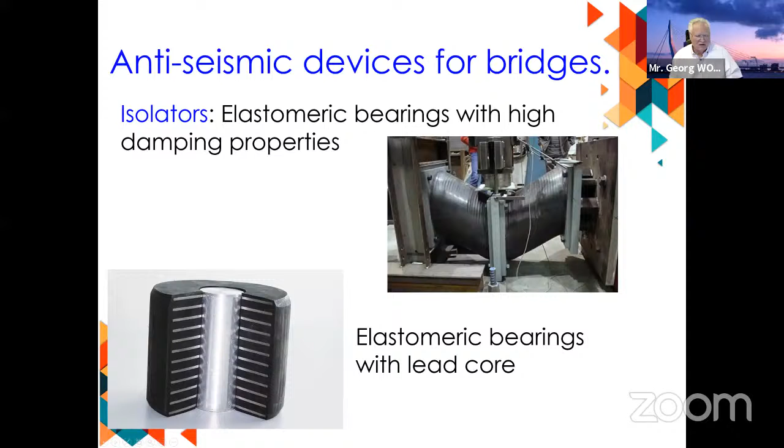For the damping, we have the hydraulic dampers, which work in the same way as shock transmitters, but this can be also a semi-active type. In this type, the liquid inside these cylinders is a magnetorheological fluid. That means by electrical loading, you can influence the quality of the fluid inside, and so you can make it very stiff or very soft to get the effect you wanted for the damping.

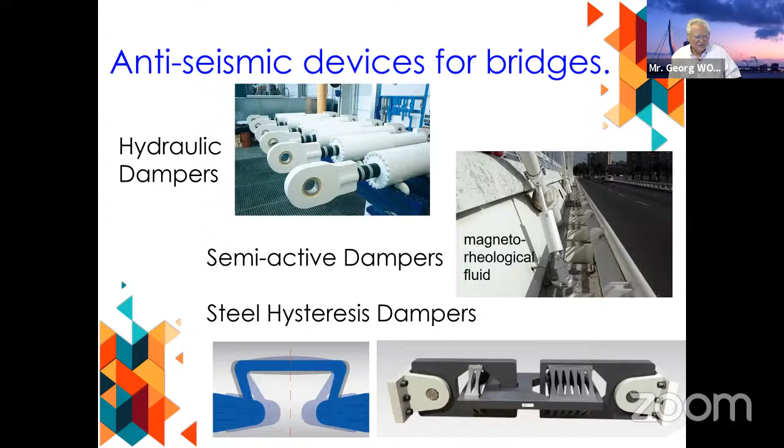And then you also have different kinds of steel hysteresis dampers, which are working with plastic deformation of steel parts. You see it here. Finally, I would like to show you a sample.

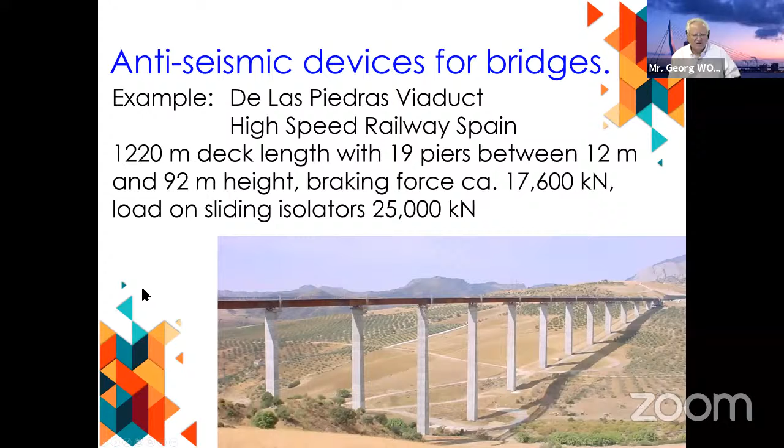This is a viaduct in Spain for high-speed railway systems, 1,220 meter deck length with 19 piers, up to 92 meter height, and the train makes a braking force of 17,600 kilonewton, and the load on sliding isolators is 25,000 kilonewton.